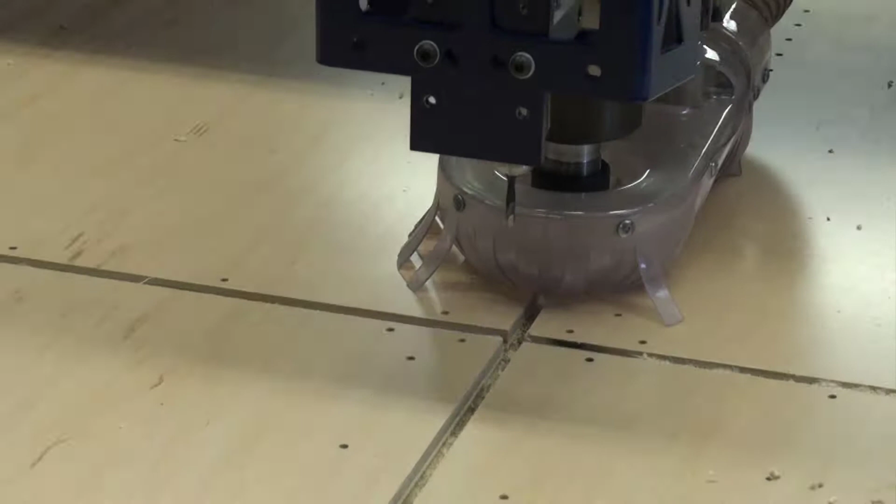Welcome to part 2 of what's new in CabWriter 4. What I want to do now is show you a couple of new construction options that we provided. These are aimed at crown molding or lighting or something like that.

What I'm going to do is go to the upper cabinets. This applies only to upper cabinets. And there are two new defaults here called top inset and extend sides.

So let me play with the extend sides first. I'm going to extend sides by 2 inches. I'll just enter 2 inches, update, close this.

I'm going to choose that cabinet, and that cabinet, and this cabinet. And I will say CabWriter, redraw selected cabinets. And I'm not going to use the stored defaults.

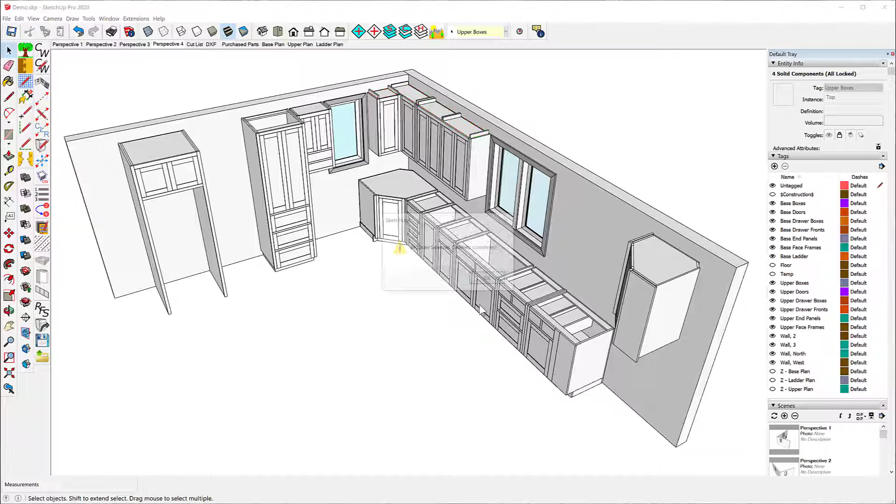So let's look at what happened here. It literally took the sides and extended them. It was just like doing a push-pull on all of the sides and extending them 2 inches.

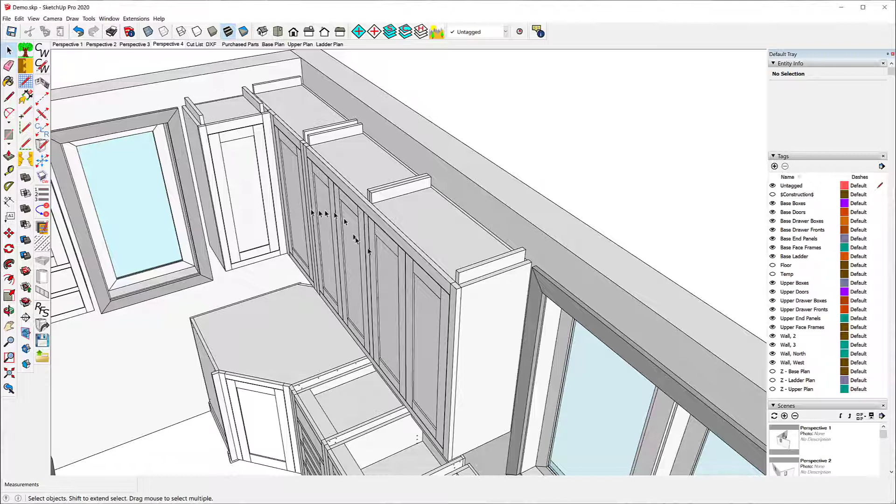The nice part about that is you can use this as attachment parts for crown molding or other things that you want to construct up here. This works with frameless cabinets as well. Makes no difference whether you're talking face frame or frameless.

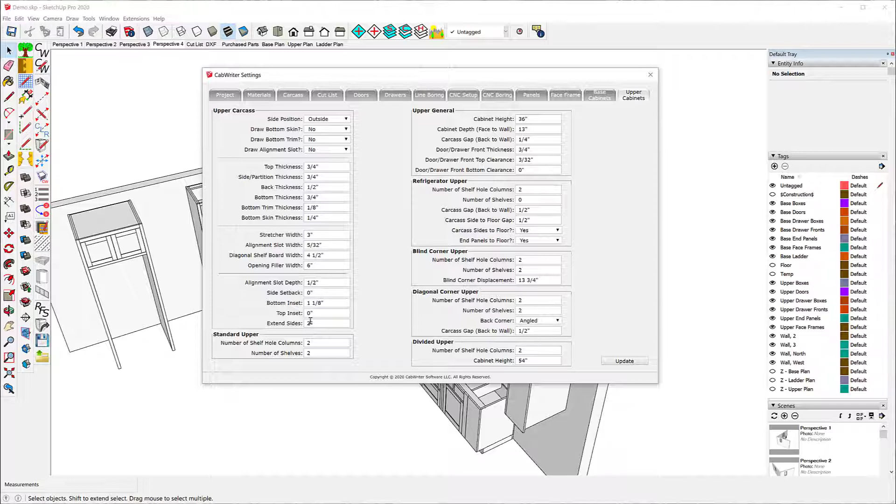So let me now show you a slightly different construction option. I'm going to put this back to 0 and make this 1. Top inset 1 inch. I'll update it.

And I'll select the refrigerator cabinet and redraw it. And I will not use the stored defaults. That's interesting.

Let me back up. First of all, before I change that, let me retrieve the cabinet defaults here. And then go and inset 1 inch.

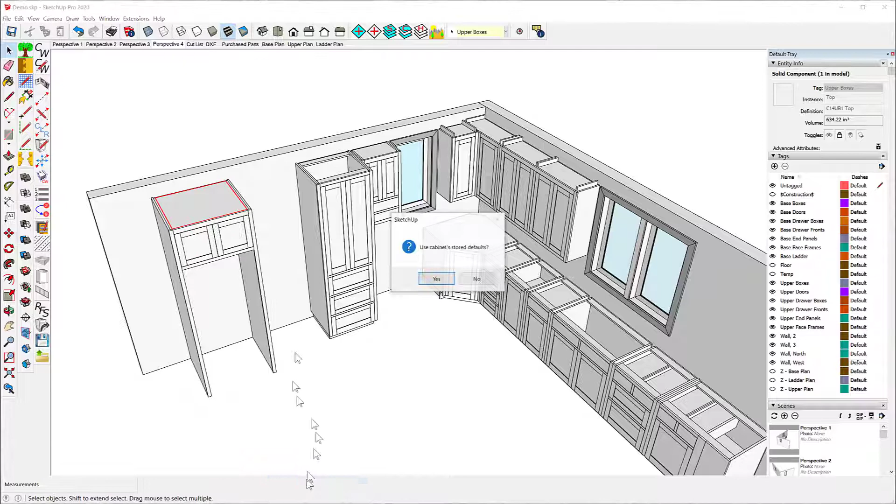Update, close, and redraw this cabinet. And I will not use the stored defaults, I'm going to use what I just changed. Notice what this does is it insets the top

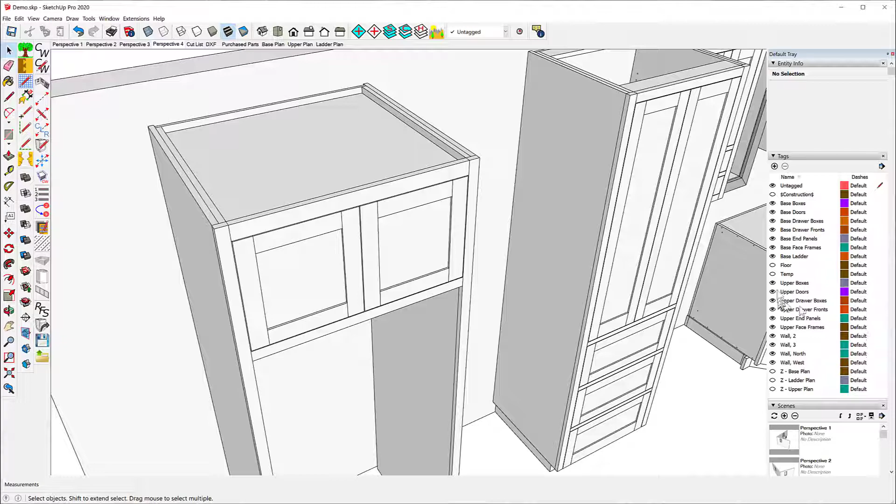by 1 inch. And if I take the doors off, the upper doors, you can see I still have the top inset from the bottom of the rail as well.

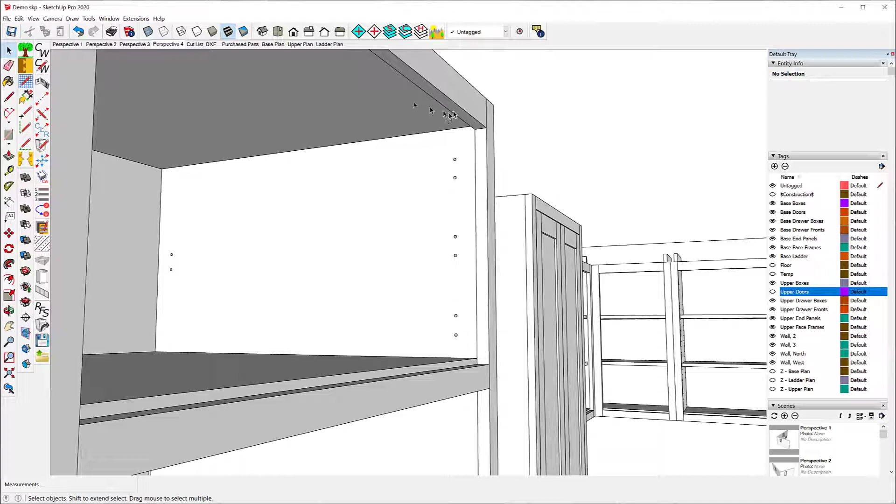What you could do, by the way, is make these cabinets slightly higher and make this slightly wider. You could make this a 3-inch rail and make the cabinets 1 inch higher, and then inset this 1 or 2 inches. It'll give you plenty of room for things like inset lighting up here, or anything else you want to put up there.

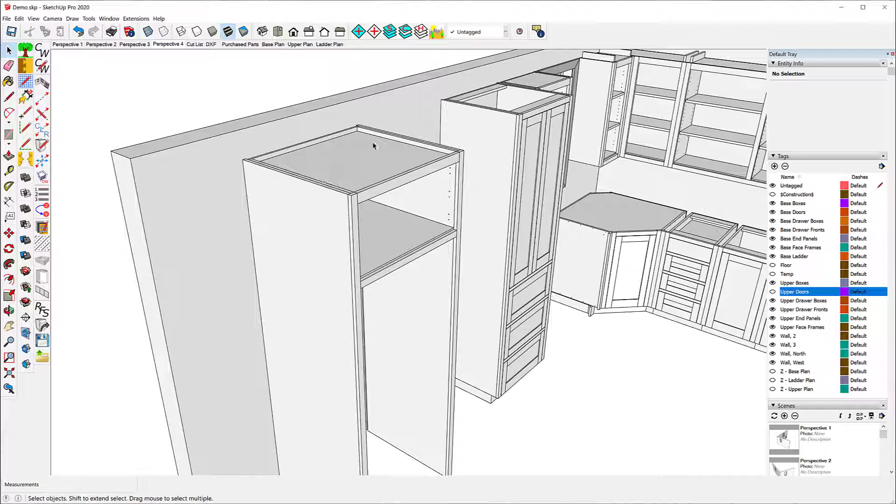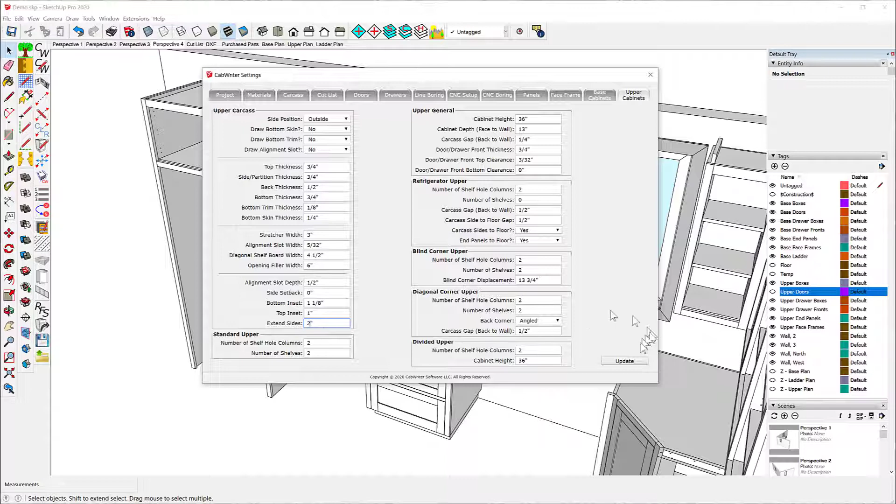Now I'll select this cabinet and get its defaults. And I'm going to inset the top by 1 inch and extend the sides by 2. Update it. Redraw this cabinet.

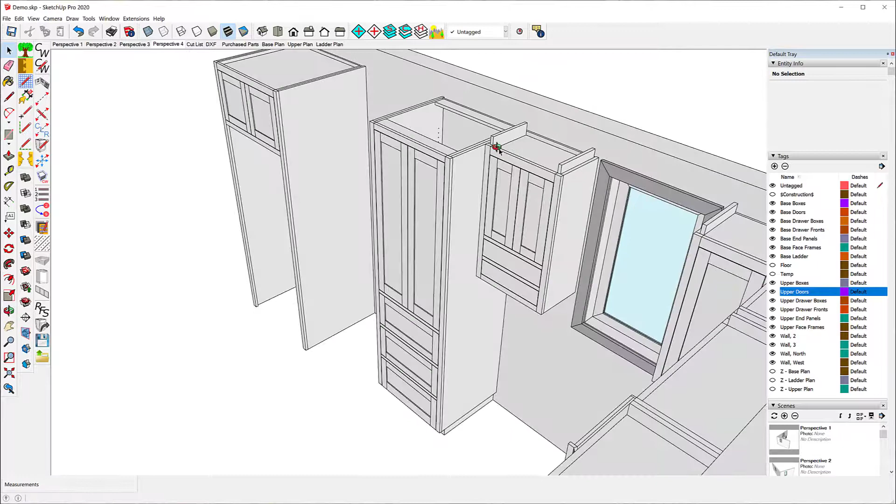Okay, so now let's look at what happened. I have the combination now of the sides being extended 2 inches from the top of the cabinet and the top being inset.

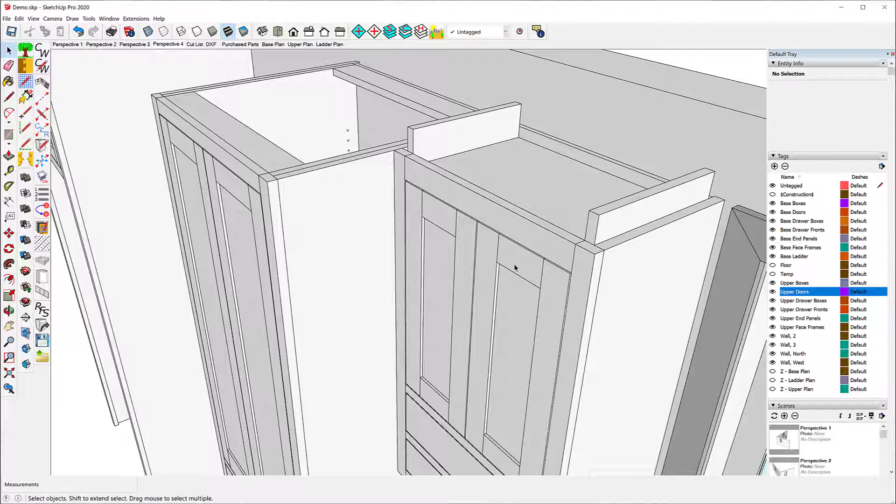These things work independent of one another and also inclusive of one another. This is a handy way to structure things like crown molding or other things that you have to put above cabinets or provide attachment points for.

I've restored all the cabinets to their original drawing. And I'm going to change this set of base cabinets down here to demonstrate the next change in CabWriter 4.

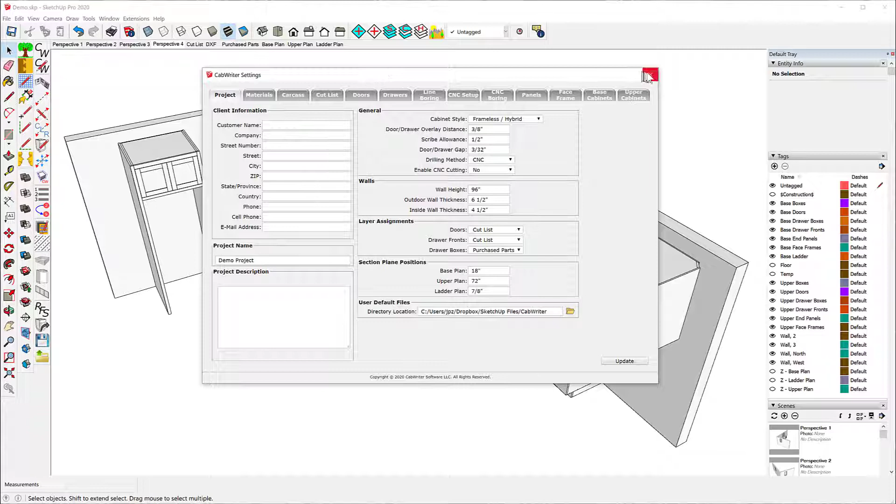I'm going to load the CabWriter Imperial frameless settings. This is pure frameless cabinets. I'll load those, and I'm going to leave them alone for the moment. I'm just going to go with the pure frameless settings.

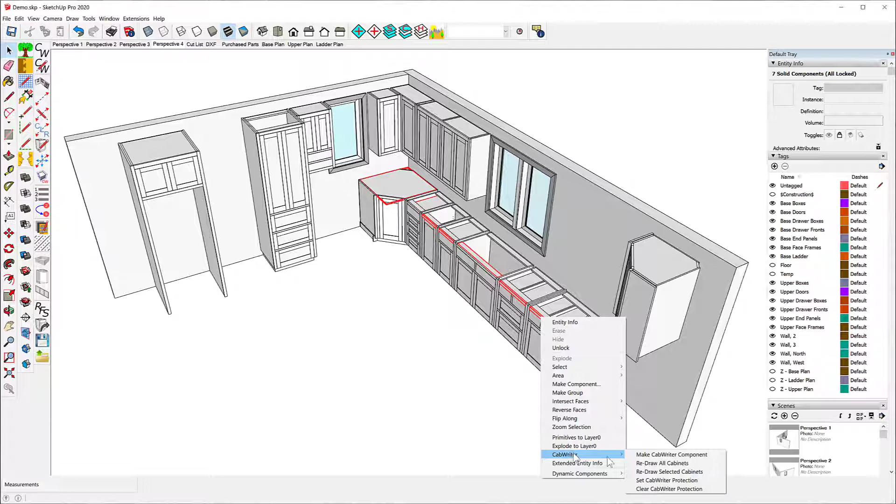And I'll select all of these base cabinets down here, and I'm going to redraw those. I'm going to say no, I want to change them to frameless cabinets, so I'm not going to use their stored defaults.

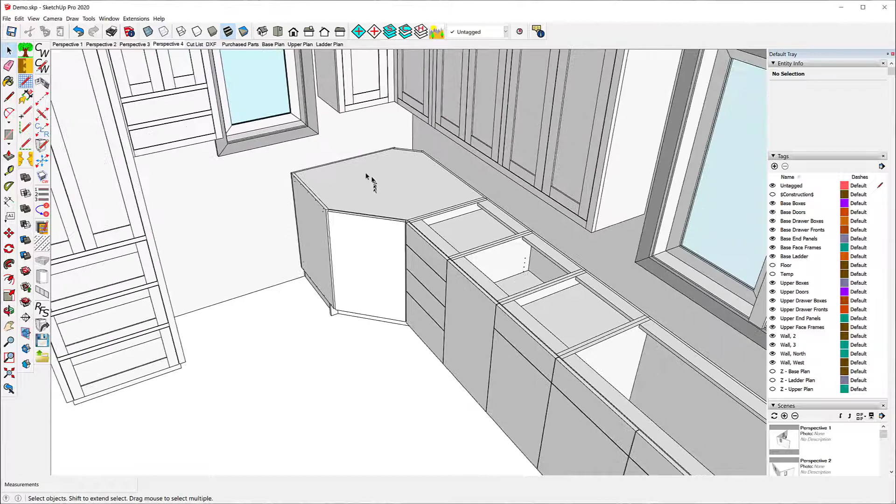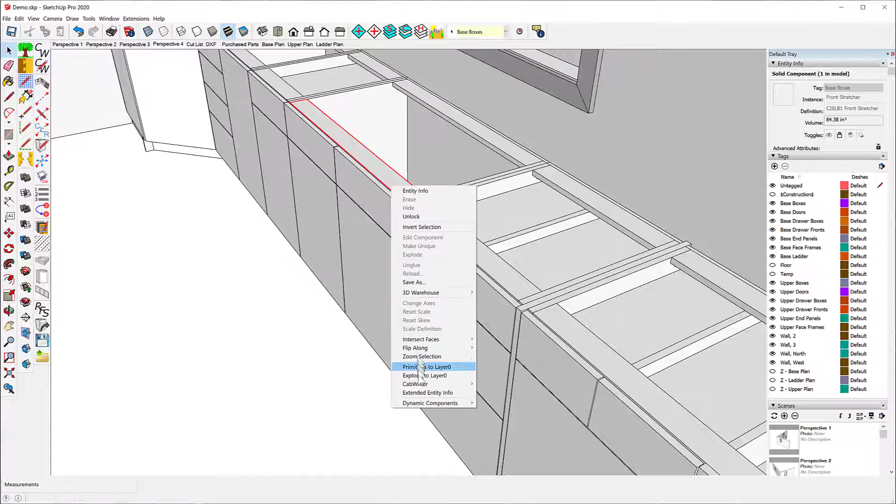Now this is a little strange because some of these are one cabinet and some are another cabinet, like right here. This cabinet is different from this cabinet. In fact, if I say select CabWriter select cabinet, you notice that stands alone. This one stands alone. That one stands alone. All of these stand alone.

So this is a little different, a little strange, but that's not the point I'm going to make here. I want to look at the doors and drawer fronts. They're simple slab doors and drawer fronts right now.

And if I wanted to cut these on a CNC machine, in other words, if this were MDF material, which I don't believe it is right at the moment, but for the moment we'll just pretend it is, I could cut these on a CNC machine. However, my edge grain would be exposed, and I'd want to put some banding on there.

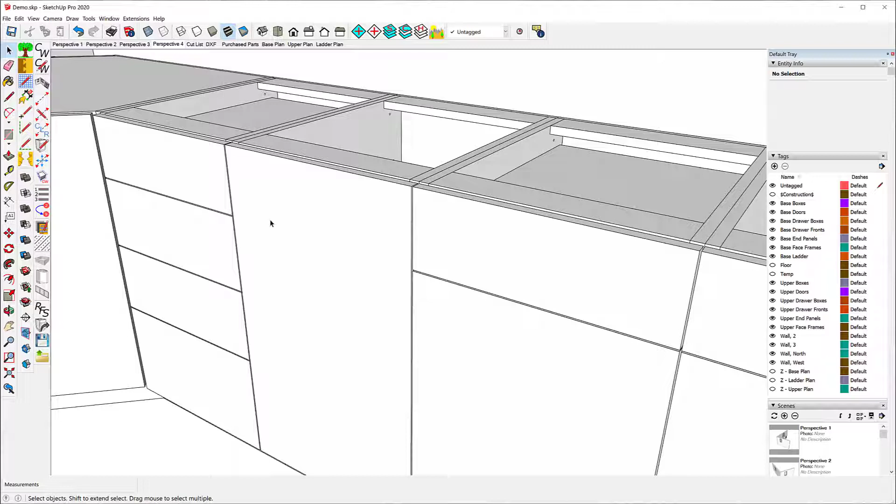But if I cut them to this dimension and then put banding on there, I'm going to have problems. It's going to encroach on the gap. So what I can do is I have a new setting called Enable CNC Cutting.

I'm going to say yes. And I will then go to the Cut List tab, where it says Slab Door and Drawer Undersizing, and this applies to either trim or edge banding thickness. I've already got in here 3 millimeters, and I'm going to leave it at 3, but I could make it 1/4 of an inch, I could make it whatever I want. Whatever it is, I'm going to trim these doors with to hide the edge profile. So I'm going to leave it at 3 millimeter. I'll say update.

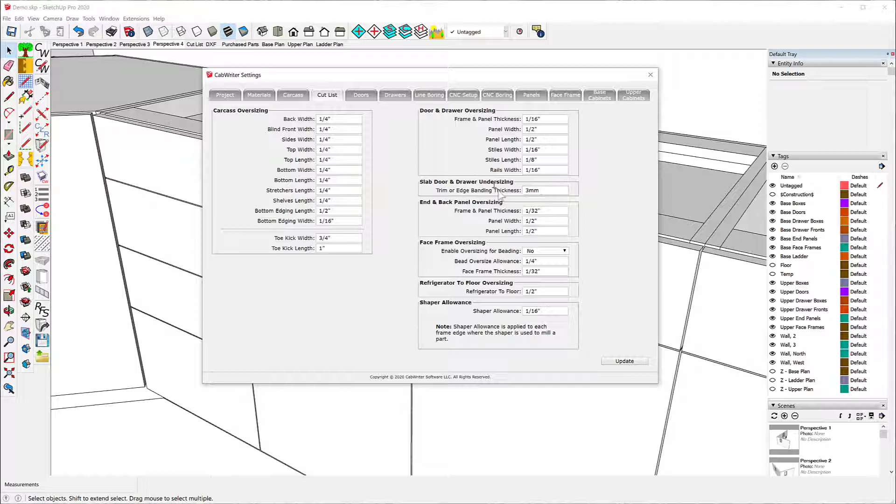And I'm going to say redraw these cabinets. Now let's see what happens.

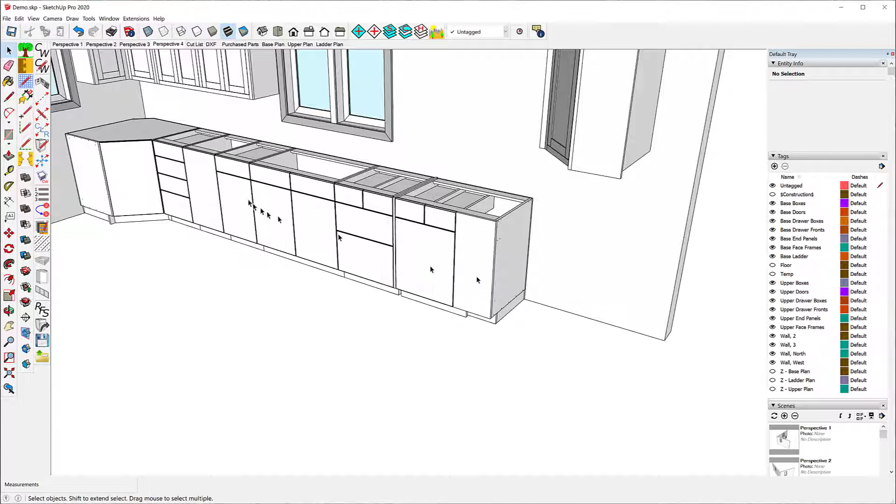Notice that I now have edge banding all the way around on every drawer and every door, including the diagonal one over here. The size of the door and drawer hasn't changed, it's just that the core of the door without the banding has changed. So I can cut it on the CNC machine, put the banding on, and then it'll bring it to the proper size.

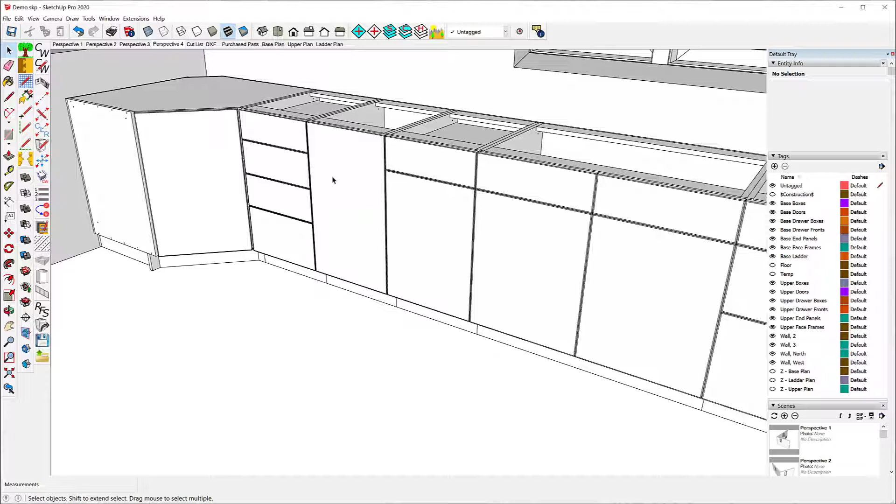So for those of you who are going to cut slab doors and drawers on your CNC machine, or on a CNC machine you may have access to, this is an easy way to account for banding or trim.

Up till now in CabWriter, we've always represented drawers by simple 3D drawer boxes. A lot of people have asked that we represent them as five-part drawer boxes. The problem is there are so many ways of building drawer boxes that we couldn't provide you all methods. Besides, most or a good deal of cabinet makers have their drawers and drawer fronts and door fronts made by a third party.

But on CabWriter 4, we decided to compromise a little bit. We decided to provide you 5 different drawer box styles that you can pre- or post-process CabWriter with, and convert these boxes into 5-part boxes. It's truly a post-processing process.

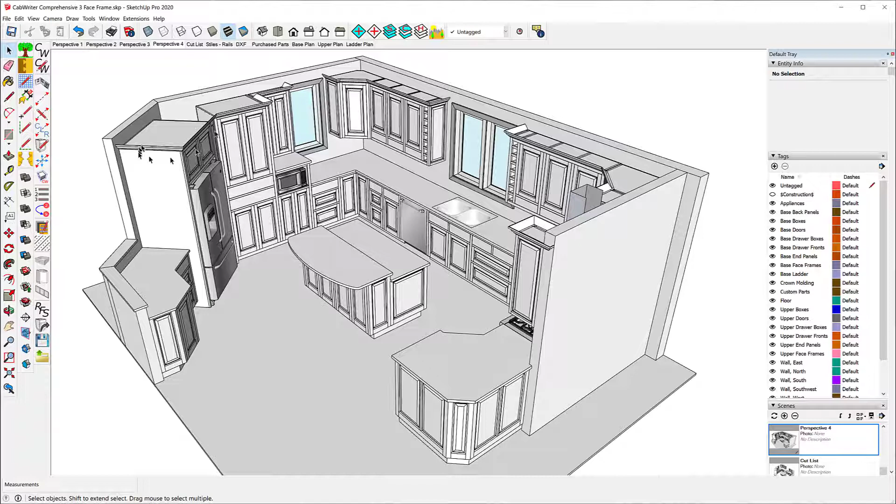In other words, when you're done with your model, and before you do create, you may actually want to create production documentation twice. You may want to do it the first time to simply get the number of drawer slides and the types and size of the drawer slides for your boxes. And then do it a second time to actually get the individual parts for the drawer boxes.

What I'm going to do now is show you how to use the tool that converts these to 5-part drawer boxes. It's here under the Draw menu, CabWriter, Create Drawer Box Parts. And it opens this dialog box, the Drawer Box Type dialog box.

There are 2 ways to do this. One is I can do it by scene, or I can do it by selection. I'm going to do it by selection at first to show you each of the 5 types. So I'll choose selection, and I'm going to start with this drawer box right there. And I'll choose the first type, which is the butt captured sides.

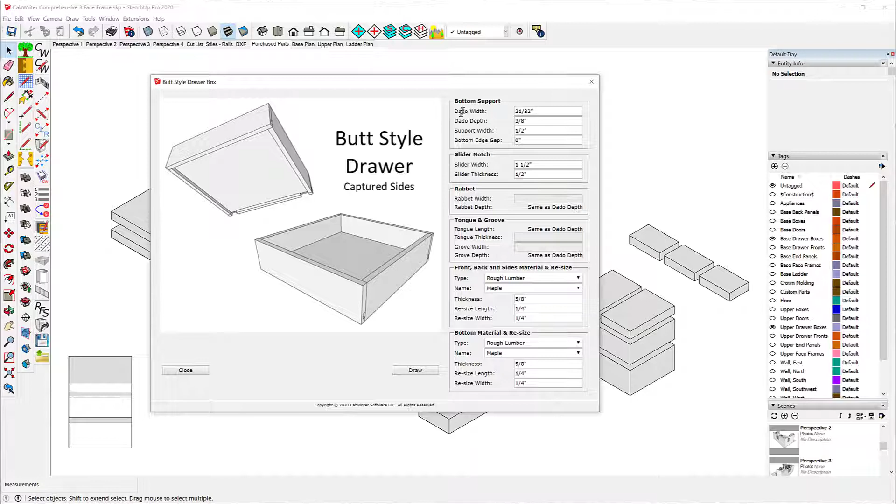So to define this, we start out with the dado width. Now what does dado width mean? Well, all you have to do is click in here, and it'll show you. Dado width is this dimension right here.

Next, you need the dado depth. These may seem obvious, but to some people they may not be. This is the dado depth. And this one in particular may not be obvious: support width. Support width is simply the width of this piece down here that is actually supporting the weight of the drawer bottom. And while you're picking these dimensions for the side, they'll be the same dimensions for the front and back.

In the bottom edge gap, I've chosen nothing here for the moment. The bottom edge gap is this gap right here, between the drawer bottom and the back of the dado. I've chosen nothing at the bottom, but you probably want to choose something just to allow for a little bit of glue or something, if you're going to use material here that does expand and contract.

If you're using plywood or something like that, you don't have to worry too much about that. There is also a gap here, but that gap is created by the size of this dado and the thickness of the bottom.

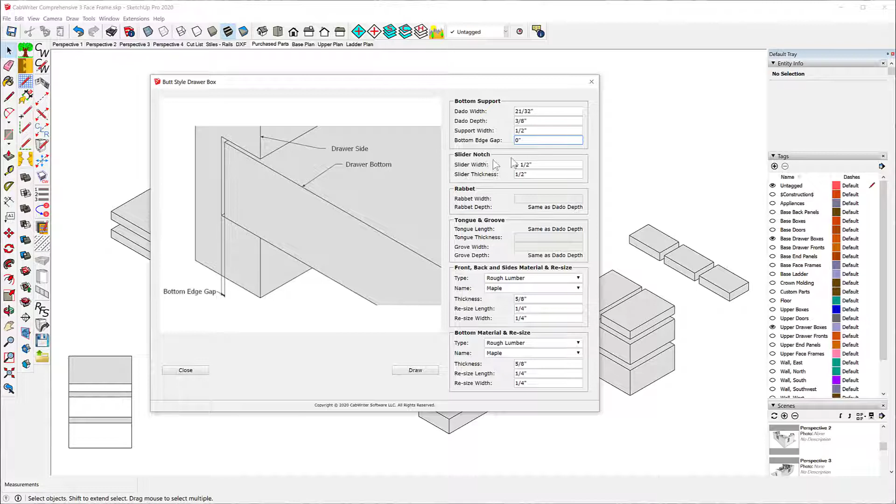Okay, slider notch. The slider thickness is how thick the actual slider is, and the slider width is the width of the slider, and you can enter those two values right here. The rabbet, tongue, and groove don't apply to this style of drawer, so this is disabled.

This is the front, back, and sides material and resizing. So the type is rough lumber maple. We're going to the thickness is 5/8 of an inch, I guess, and resize the length and width by 1/4.

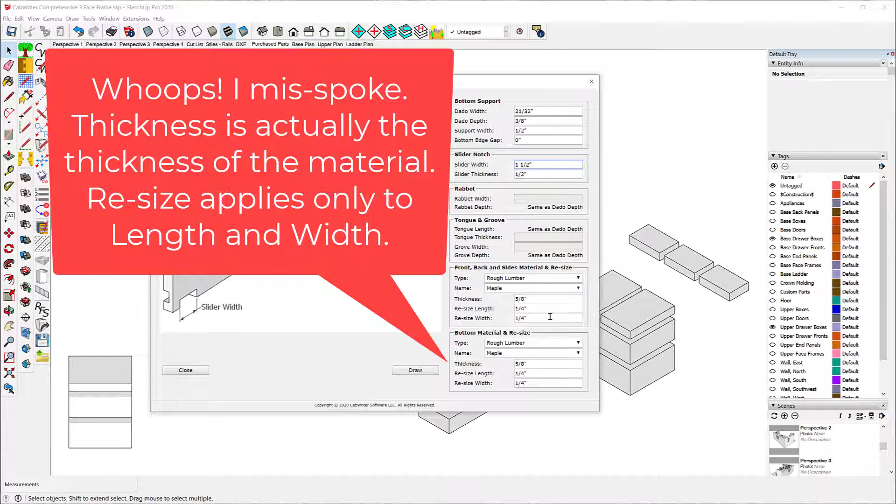You may not resize at all if these are sheet good materials and you're going to cut them on a CNC. Same thing for the bottom down here.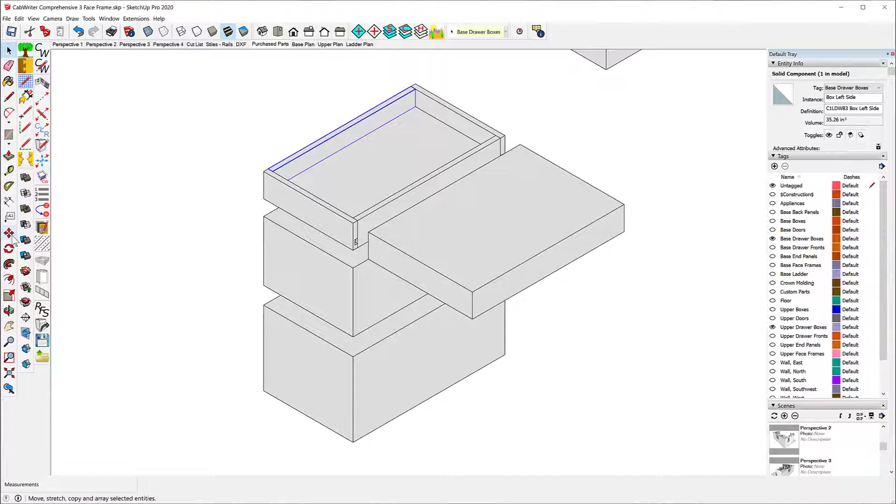So now that I've filled in all of this, I'm just going to say draw, and you'll see I have my first part. Again, these are captured sides, simple butt joints, and the bottom is captured in this dado all the way around. If I unlock this and pull it apart, you'll see the dados are in the sides as well. Okay.

Now I'm going to select this one. I'll go to Draw, CabWriter, Create Box Parts, and do it by selection. I'll do the second one here, say OK, and use the same method for defining all of this, using the same defaults.

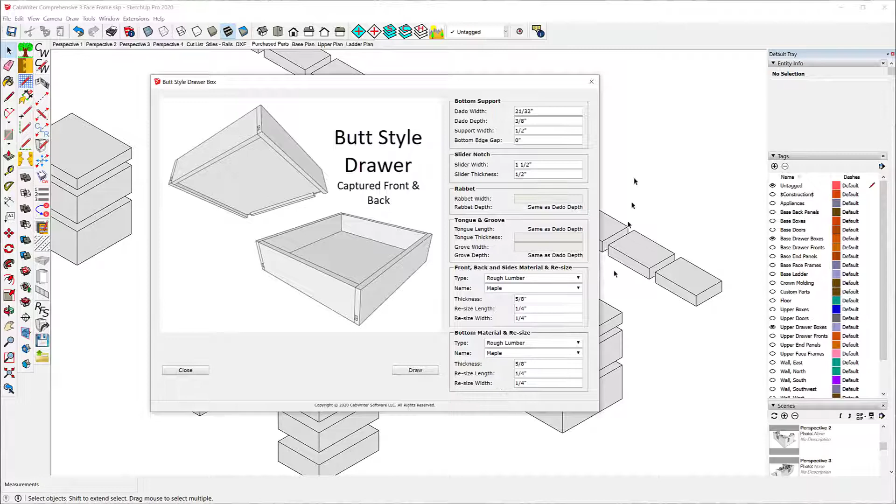So I'll say Draw, and now I have my second type here - I'll go through these in a second, but for now let me just draw them. I'll say Draw, CabWriter, Draw Box Parts, by selection, and use the third type.

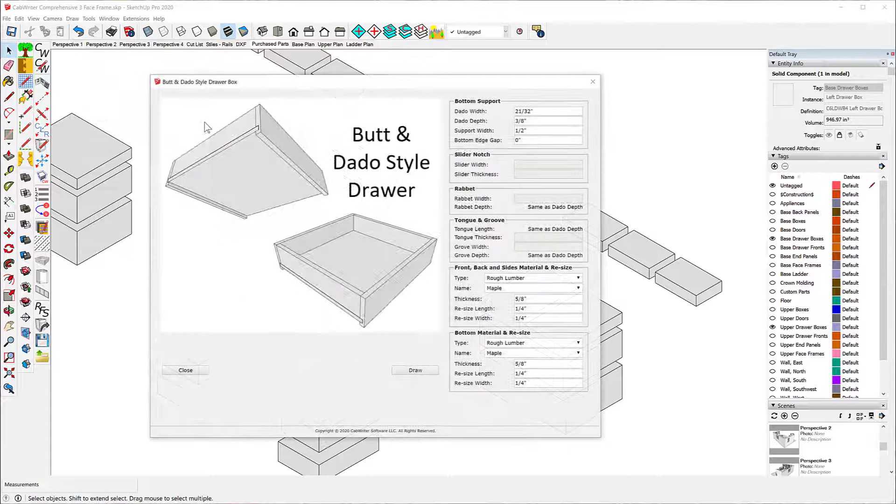And say Draw. I'll do this one by selection, using the fourth type called rabbet.

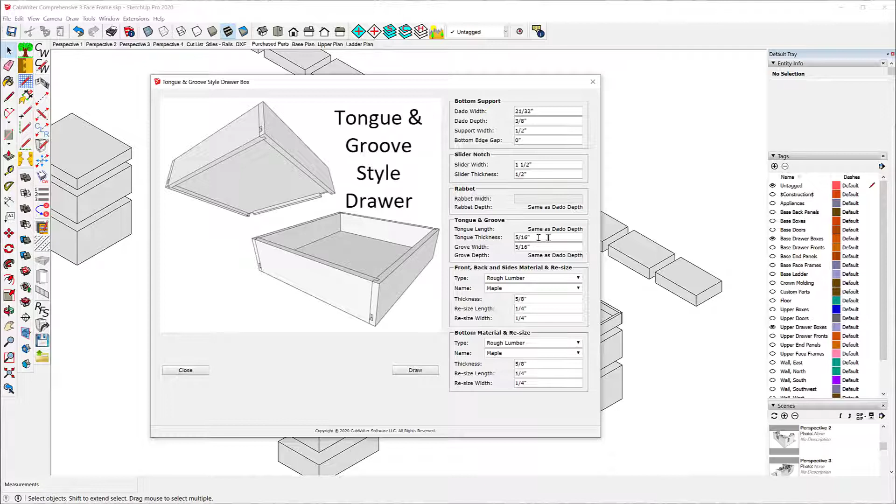And finally, by selection, the fifth type: tongue and groove. By the way, notice the tongue and groove - you've got to fill in these, and that's the tongue thickness and the groove width. Okay, and I'll say draw.

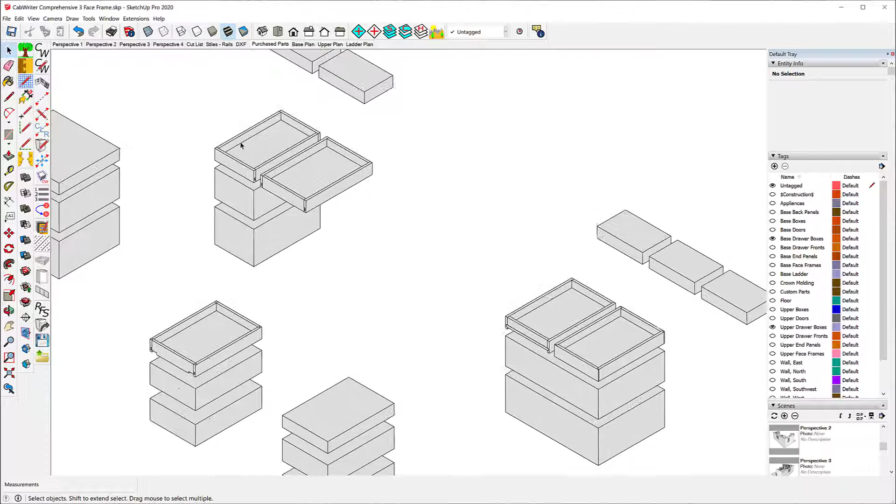All right, now I'm going to look at each one of these. As I said, this is a simple butt joint, and the sides are captured. This is exactly the same, except it's the front and back that are captured by the sides. But again, butt joint.

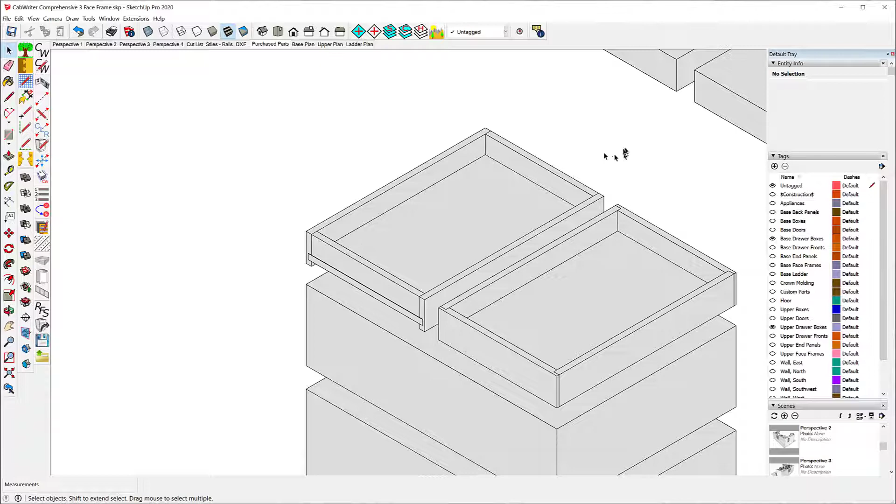This one is different. No, actually we're looking at the back of the cabinet here. Oh, I guess we can't tell what we're looking at. But what happens with this one is the drawer bottom comes all the way to the front edge of the front and back, so that you don't have to worry about the slider notch.

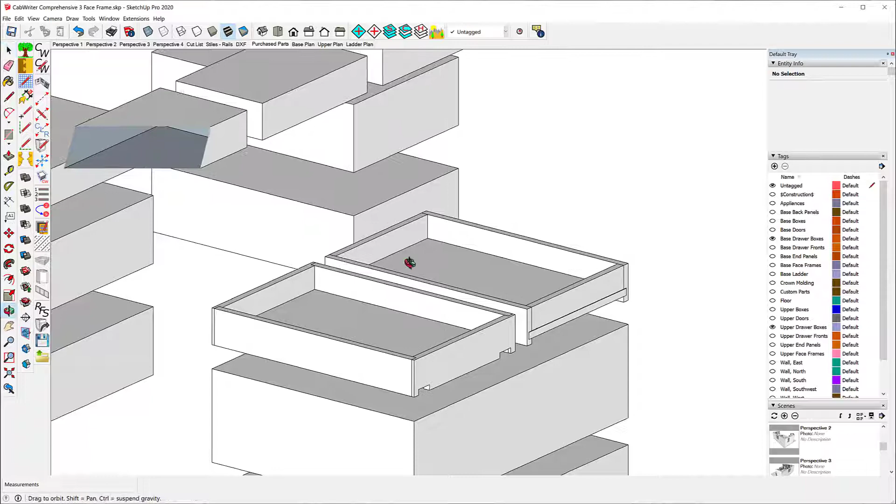This is the rabbet joint. Notice this is a simple rabbet, both front and back. And again, you can't see them here, but the bottom's captured by a dado that goes all the way around.

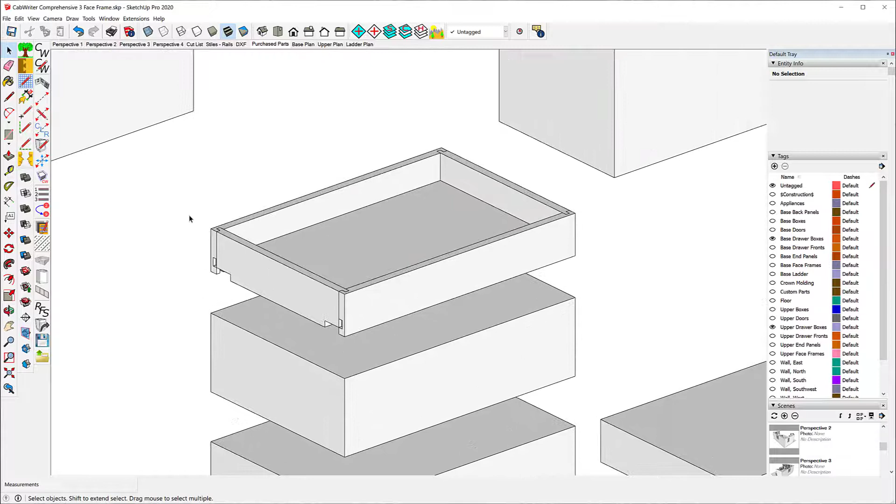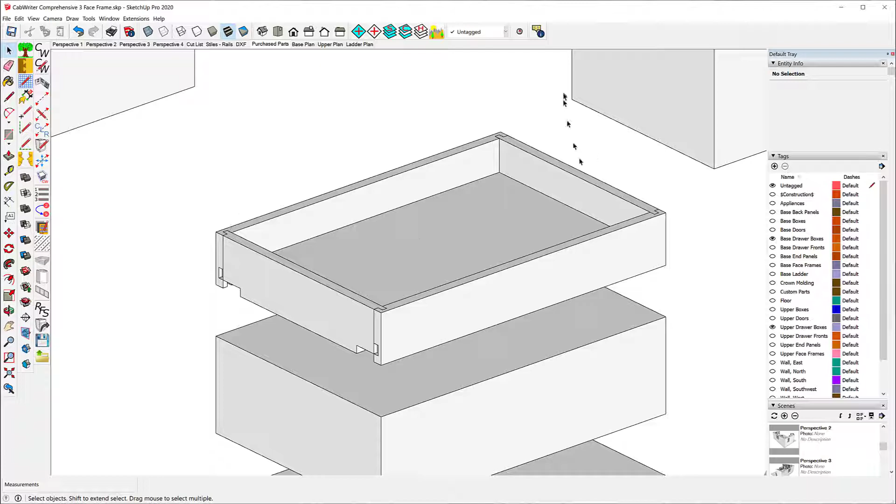And finally, this is tongue and groove. We're looking at the back. Notice the slide notches are here, and the back and the front actually have a tongue and groove joinery right here. So that's the 5 different types.

Interesting that this one - for those of you who are going to build your own and do dovetail joinery - this one right here actually gives you the correct dimensions for dovetail joinery if you set up the rabbet joints correctly. You can picture tails and pins here. So this gives you the correct dimensions. That's the one you'd want to use if you're going to do dovetail joinery, however you do your dovetails. I'm sure you do them all by hand.

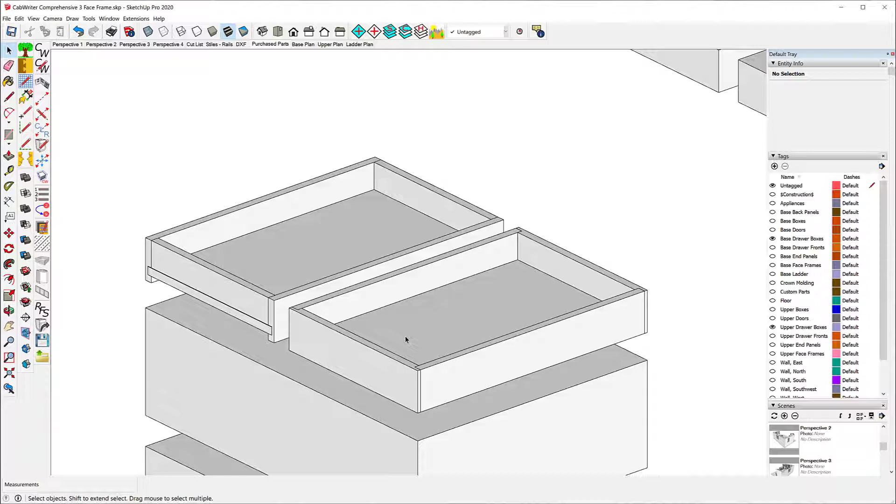But in any case, so now what I want to do is back up - 1, 2, 3, 4, 5. Whoops, 5. And I'm going to now do all of these.

The way I do that is I say CabWriter, Draw, CabWriter Drawer Box Parts, and I select scene this time. And the scene I'm going to select is the Purchased Parts scene - that's the one that these boxes are on.

Now, like I said, you don't want to do this until after you've created production documentation that included the drawer box parts, because that's where your information about the slides, the types of slides, the vendor, the dimension of the slides, and the quantity will be captured. So you want to do that first.

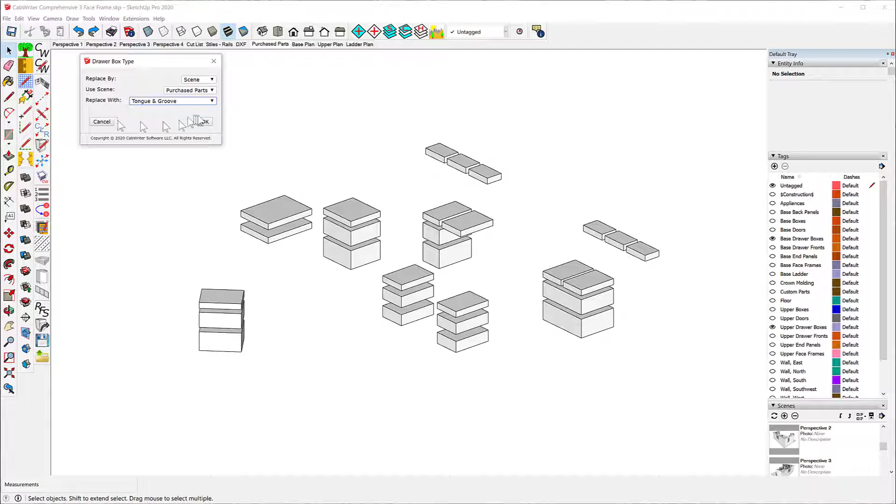All right, so now I'm going to change these all to - I'm going to make them all tongue and groove, just to show you that it takes a little while for that. That's the most complex joinery. And I'll use the same defaults that I've been using. This will take a while, so be patient.

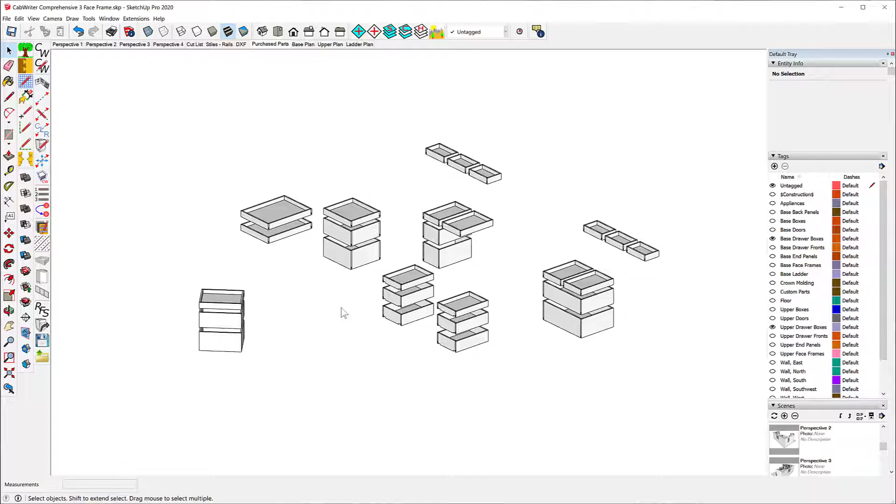Okay, that actually took about almost a minute, and it drew all of the boxes. By the way, at this point you can change the dimension of drawers - you can make them shallower, taller, deeper, whatever you want to do. You couldn't do that when they were in the simple box form, but you can when they're in this form.

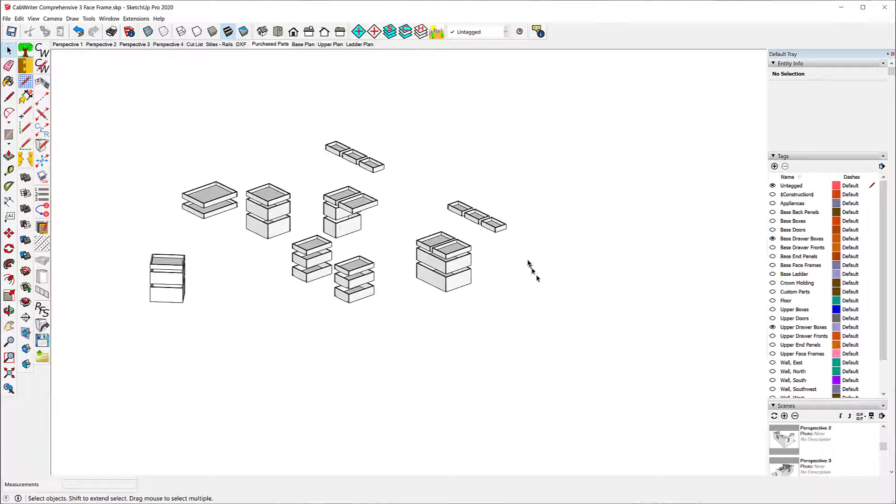And now you can include these parts in your cut list. You can make a different scene or change the name of this scene from Purchased Parts to drawer boxes or something, and include them in your cut list or in your DXF scene if you want to cut them on a CNC machine. So at this point, they're like any other CabWriter part, and you can include them in cut lists or create DXF files for them. I'm going to undo this and save it so my file goes back to its original.

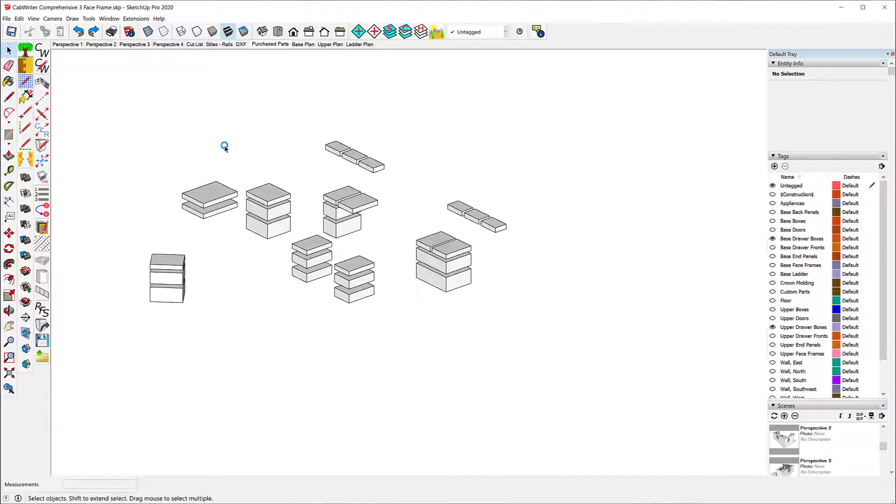All right, so that brings us to the end of part 2. There are a lot of other changes and fixes in CabWriter 4, too many to go through in a video like this, but you'll see them as you go along. And I hope you actually enjoy and like what we've done to CabWriter 3 to bring it up to what we now call CabWriter 4. Have a good day.